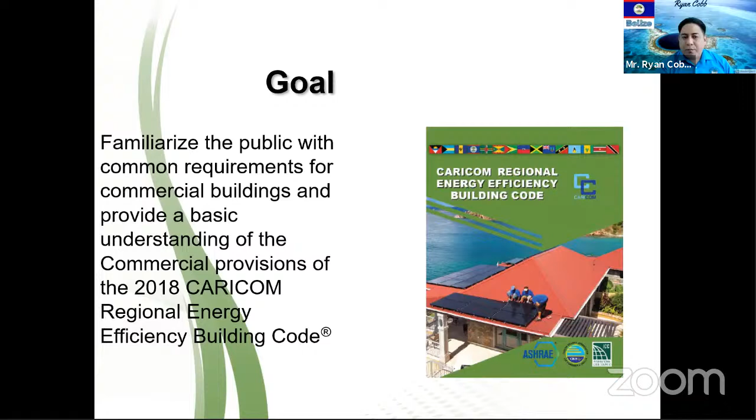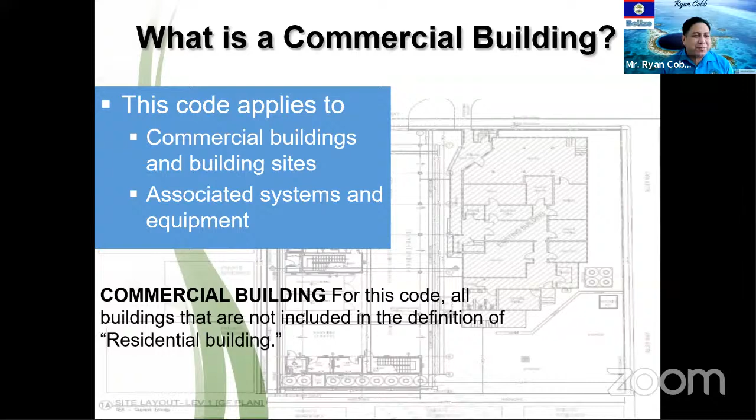But before we begin, first we must understand what commercial buildings are. The answer to that is quite easy today because of the presentation by Mr. Churchill yesterday. Quite simply put, a commercial building is any building that is not classified as a residential building. Going back to yesterday's presentation, it showed us that a residential building is any detached family dwelling or townhouse, or any building used for residential purposes that is 3 stories or less above grade plane. So any buildings that do not fall within that criteria are classified as commercial buildings.

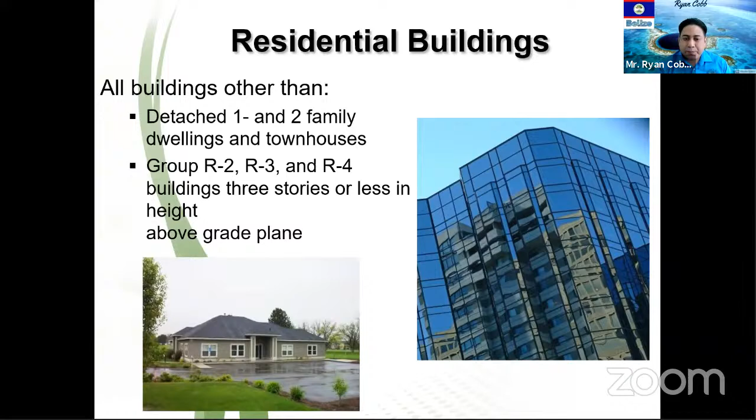But how about those buildings that have dual purpose, those buildings that serve both as residential and commercial, as many buildings within our region occasionally do? Usually you may have a family store and you live on subsequent floors above that. The way the codes are applied is that for each section of that building, you apply the respective codes. So for the residential section, you'd apply the residential codes, and for the commercial section, you would apply the commercial codes. Of course, all of this still has to meet the criteria of the previous slide, where if the building is above 3 stories, then all commercial building regulations and codes have to be applied.

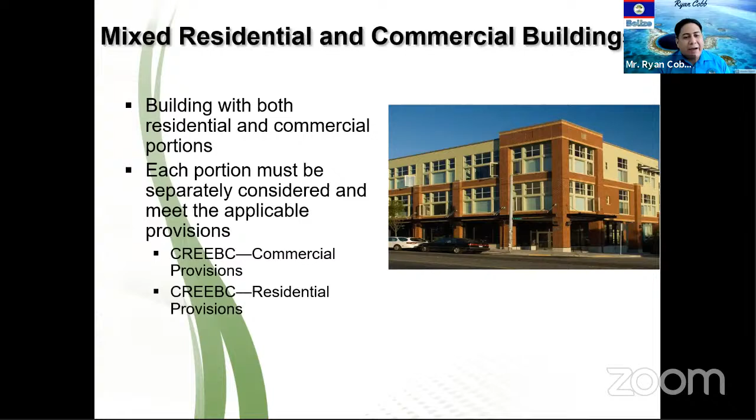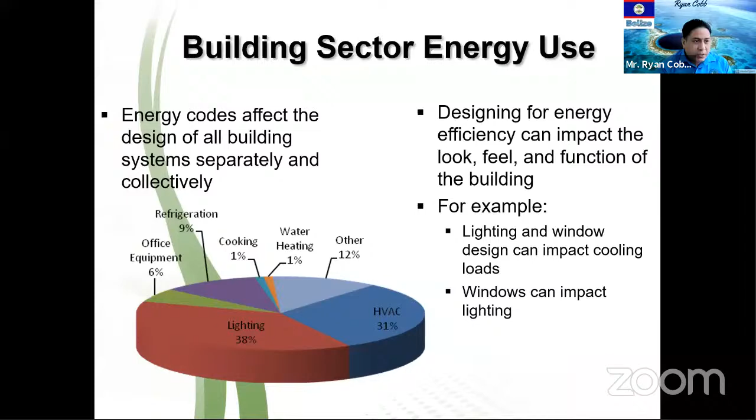What are the implications? What are the forms? And how do we do the compliance for the different sections? The intent of the code itself is to conserve energy over the useful life of each building, promote flexibility and innovation, and this code does not override any other pre-existing codes within the country or region of application.

While this may be the outlay of the intent within the code itself, ultimately what the code is trying to do is get best value for money. What do I mean by that? I mean you create the best living conditions, the best interaction conditions, the best business conditions for value of money. So ultimately what we're trying to do is save money for the type of work that the building is doing.

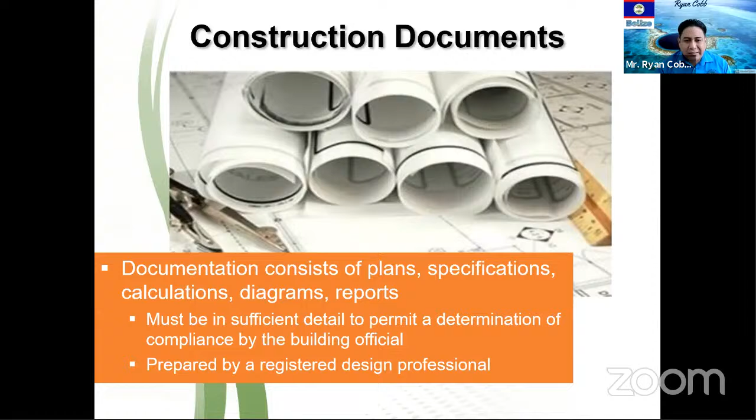Of course, for the implementation of these codes, we must all prepare the various construction documents required to submit to your local authorities. These documents must be very specific and have sufficient detail to determine the compliance of each building.

The information in these documents must include, but is not limited to, the thermal envelope of the building, the air filtration, the mechanical systems, water heating services or systems that they may have, and the electrical and lighting controls.

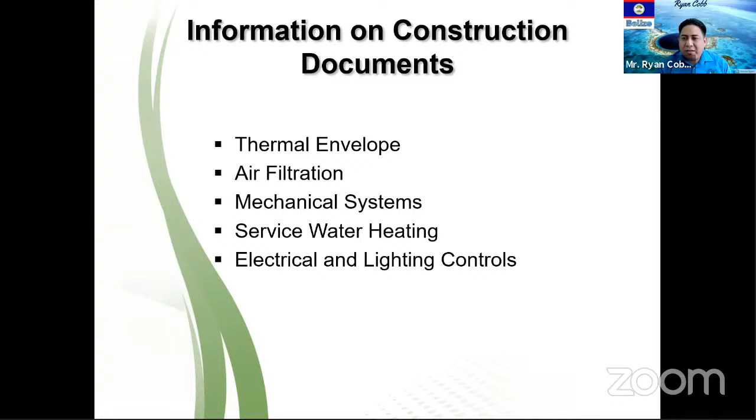As you may have seen from a previous slide, the electrical and mechanical systems make up the majority of the energy use of a building. So all other components are basically to help with that as well, to help reduce, not the percentage, but definitely the amount of energy that you use in these systems.

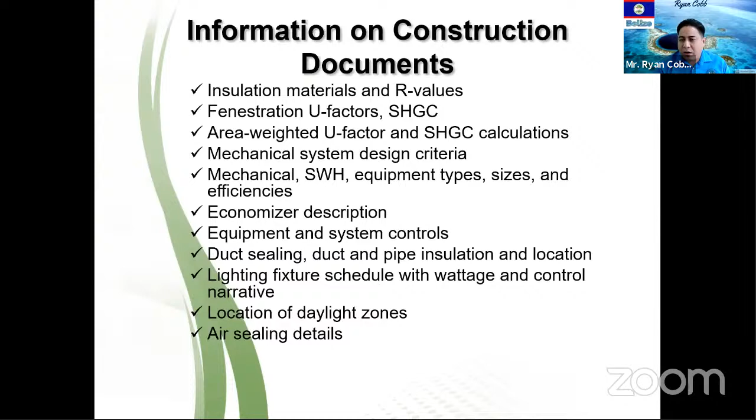This is just a little bit more detail of the different types of information likely found on these construction documents, which would include things such as insulation, U factors, your fenestration, your heating controls such as economizers, your ducting, and any type of daylight controls you may have for both interior and exterior lighting.

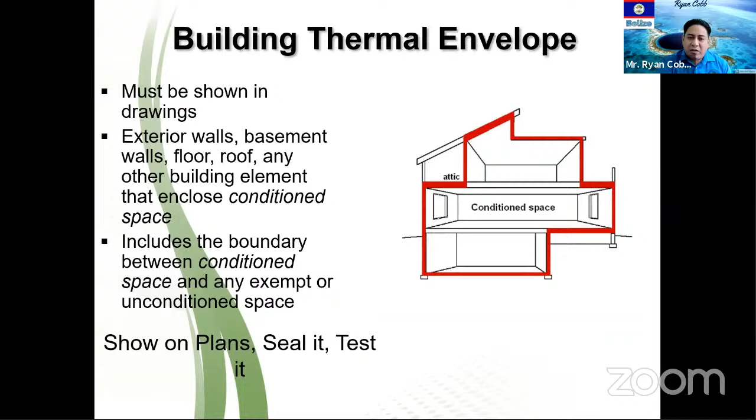But in order to design, first we must classify what are the different parameters that we need to design for. And this is all based on the different climatic zones that exist within our region.

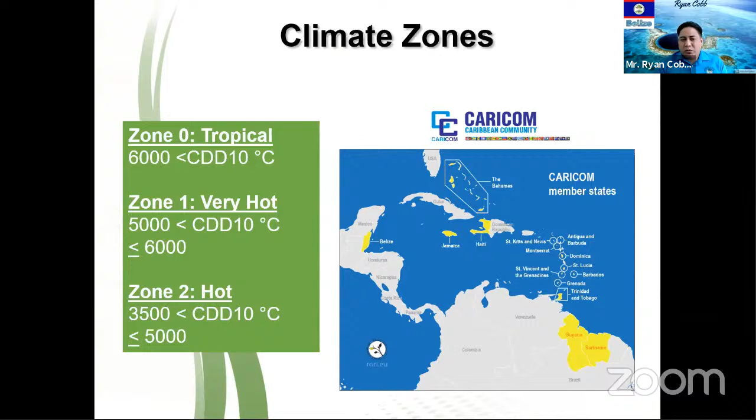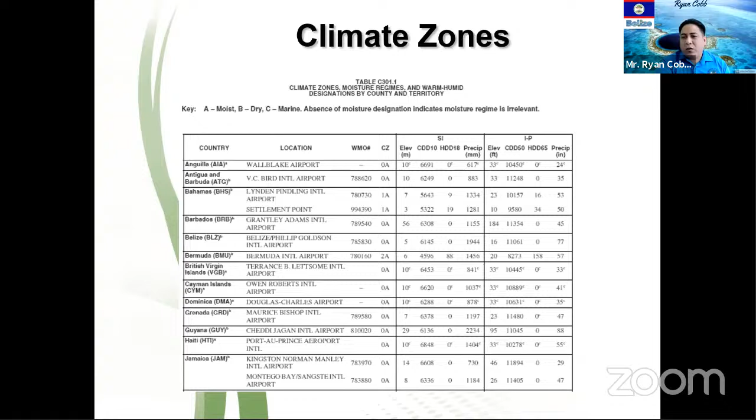For example, I am currently residing in Belize, and Belize is considered a tropical zone. So you can see here on the CZ, it is 0A. So Belize is considered tropical zone 0.

When designing for cooling, we have certain parameters that we must adhere to. For interior design conditions, the maximum cooling that we should design towards is 24 degrees centigrade, and for heating is 22 degrees centigrade. These are the parameters used to both test and certify that your buildings are in compliance with the standards. It does not mean the building cannot cool or heat beyond that, but those are your design parameters.

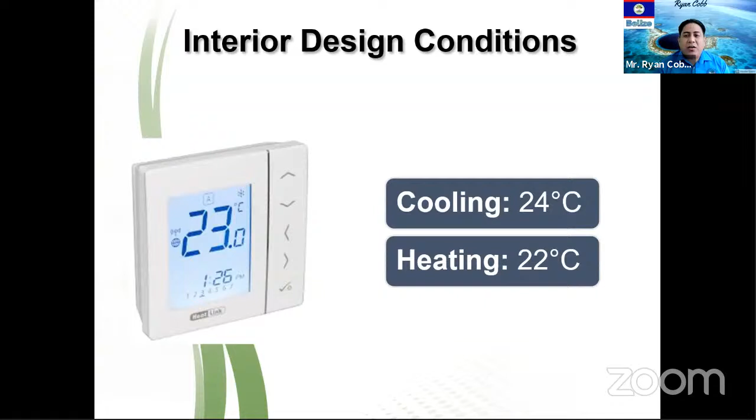You must also consider your building materials, which are important. Within your building materials must come the labeling so that your contractors know the different types of insulation and U factors they are using within the construction zones. Those apply to both traditional methods, such as blow-in insulation, or those you may use to cover the walls so as to increase your insulation on your walls.

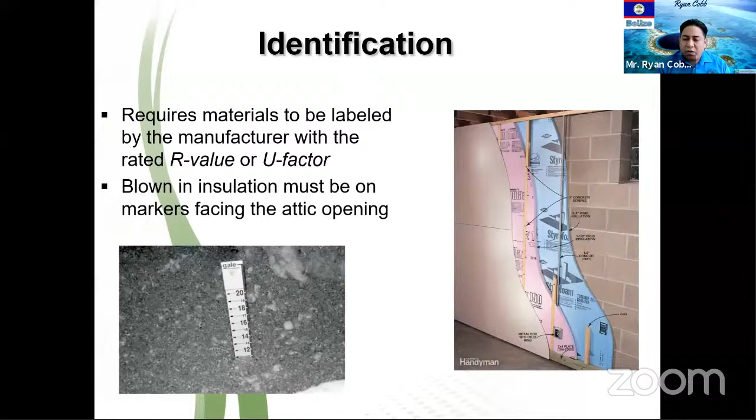Your windows and doors also now go through this requirement. Previously, as said in yesterday's conference, we had typically gone about picking windows and doors just by design, how aesthetically pleasing and functional they were. Well, now we must go a bit further than that and look into the thermal capacities of these different utilities. We must look if they have any type of glass, see if they're glazed, double walled, and even your doors, to see if they match these criteria as well.

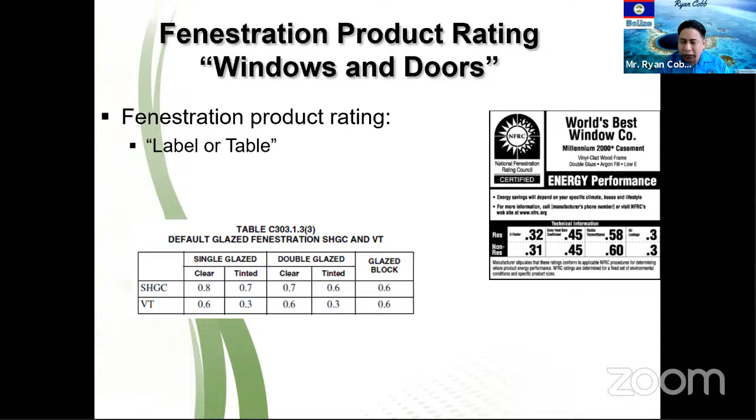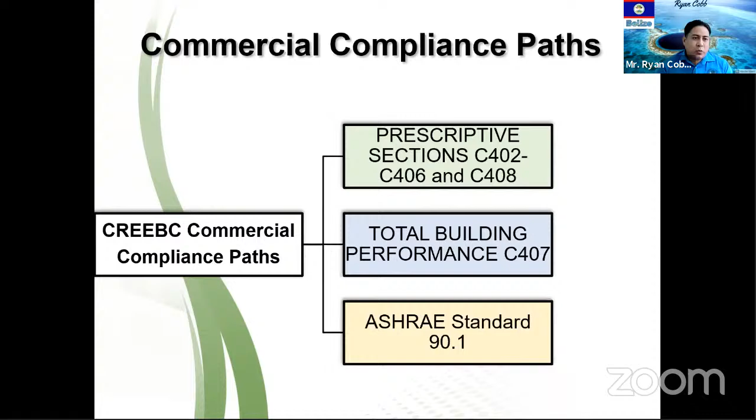Within this code, as is also the case with residential buildings, there are three ways of being in compliance. One is the prescriptive sections, which detail what needs to be implemented for the various areas included in the code. Another is total building performance, where you have mandatory and modeling scenarios that can be used to determine if the entire building is in compliance. You also have the ASHRAE standard, which will be covered in more detail in tomorrow's session.

To go into a bit more detail within the prescriptive sections, as we stated, it is broken down into various components: your envelope or thermal envelope, your mechanical systems, your water heating, your lighting, and additional efficiencies such as more efficient lighting, more efficient ACs, or renewable energies such as solar, wind, and heat pumps.

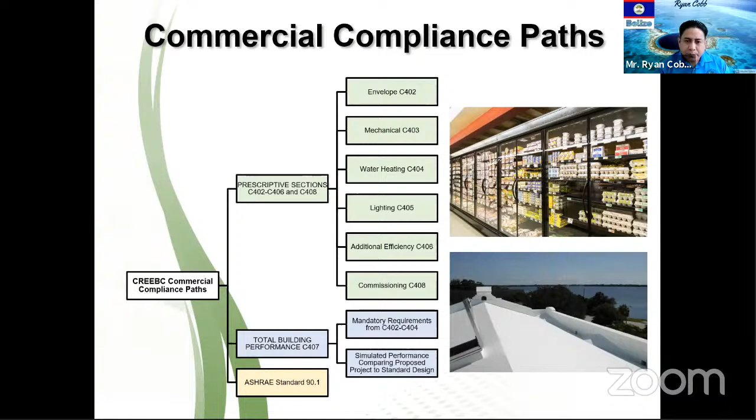So let's go into the building envelopes. When we talk about the thermal envelope, we are specifically talking about structures such as the roof, the walls, the vertical fenestrations, and skylights. Fenestrations are all those exterior wall openings that have doors, windows, and skylights. Those are what are classified as fenestration.

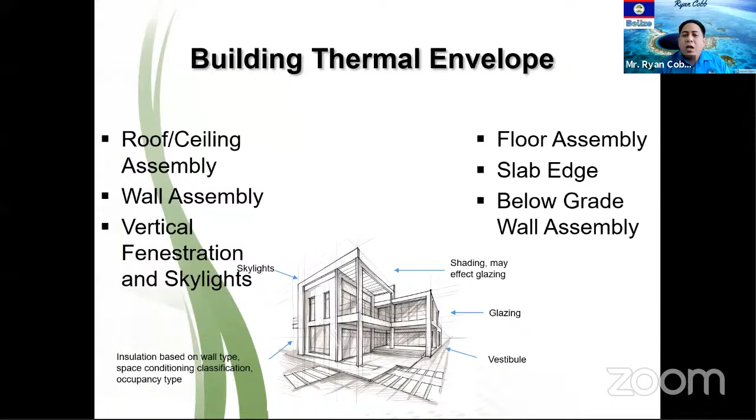We must also importantly look at your floor assembly. Is your floor assembly properly insulated? When we talk about insulation, we're not talking just about things such as blown insulation, but it also goes into the type of concrete used for those floor assemblies, such as ground floor and even intermediate floors.

The prescriptive path compliance will tell you what are the requirements for your insulations. They tell you the thermal requirements for your roofing, for your fenestrations, and also what are the permissible allowances for your air leakages.

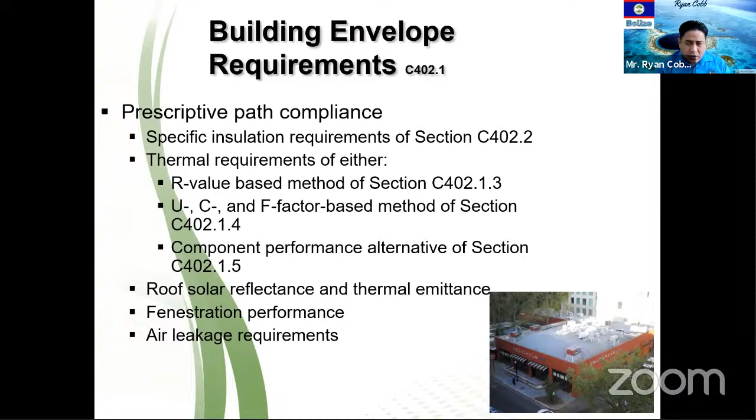Here we have an example of the type of insulations that certain establishments may want to use for the roofing. As you can see here, they are putting in slabs of insulation over the metal corrugated roofing.

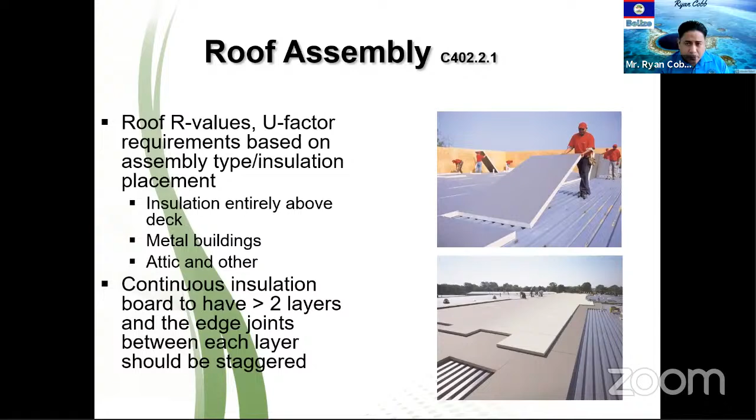We also have solar reflectance and thermal emittance requirements specifically for those types of metal roofing. For skylights, which are also considered fenestrations, there are acceptable limits and treatments needed for those types of structures.

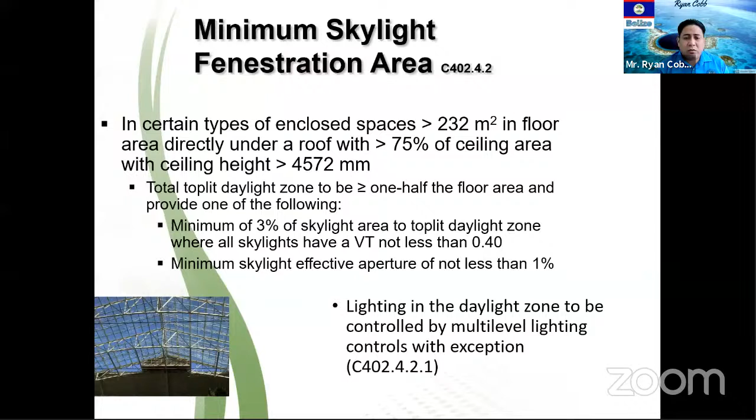When we go into air infiltrations, we're talking about your air leakages, your barriers, your air intakes, because one thing a building needs to do is air exchanges. You need to ensure proper levels of fresh air coming into the building, so as to have proper levels of oxygen and release harmful carbon dioxide and carbon monoxide gases back out into the atmosphere.

This also covers areas such as vestibules, which are the areas between your outer door and your inner door. These are usually where, whenever you step into a building, you feel that rush of air before actually getting inside. These are what are considered the vestibules of the building.

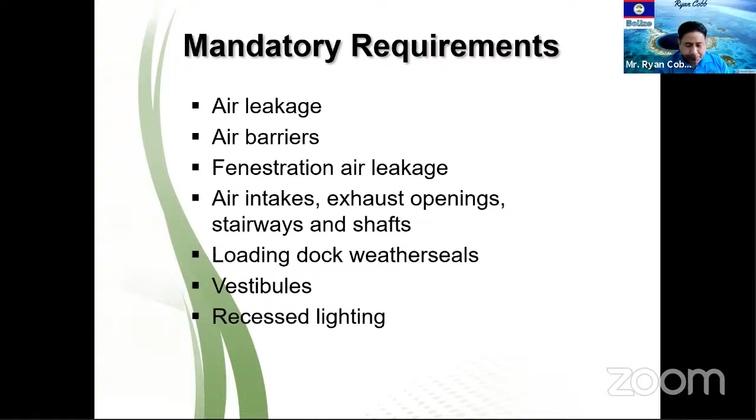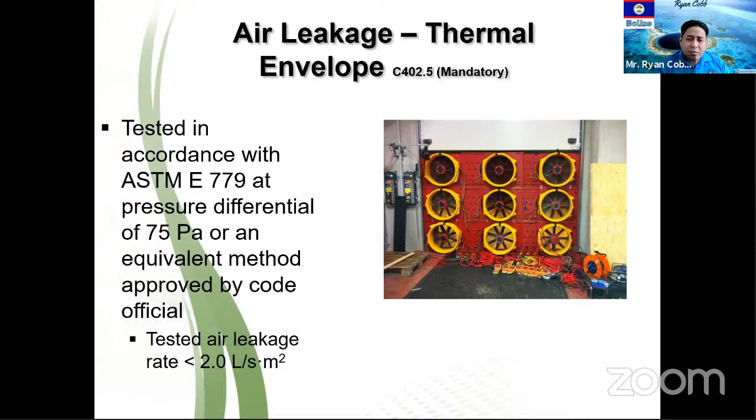Your air leakages are normally tested by positive pressure. Usually you pressurize an area, and over time you measure how that pressure trails off, if it trails off, and what are the permissible levels for those pressures to go down.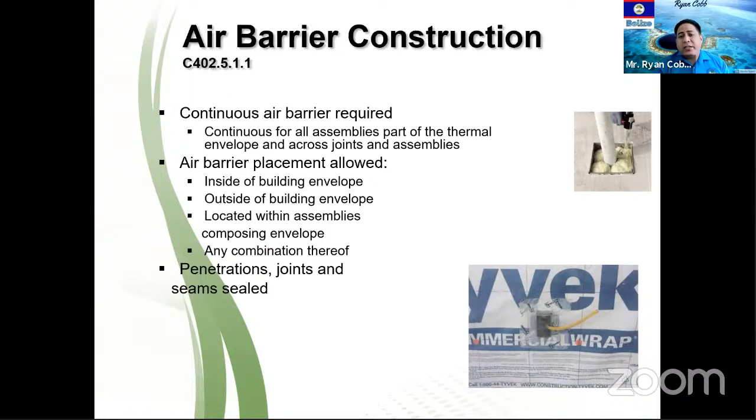Under your air barrier constructions, any plumbing or electrical that goes in between floors or between buildings needs to be properly sealed off, not just insulated, but properly sealed, so that there are no air leakages between these cracks and crevices as well.

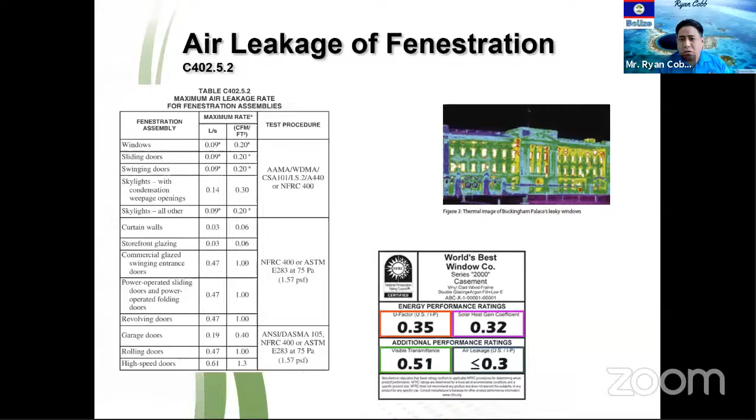The use of thermal cameras is a very useful tool when looking at very large buildings. You can determine if there are any types of air leakages just through your thermal devices. You'll be able to detect hot and cold spaces, and that's usually how you can tell if it's a heated area with heated air coming out, or a cool area with very cool spots, specifically around doors, windows, or service panels.

One area that's not often looked at, but is vitally important, is loading dock areas. If these areas are conditioned, they need to ensure they have weather seals, because they too form part of that thermal envelope and air leakage envelope.

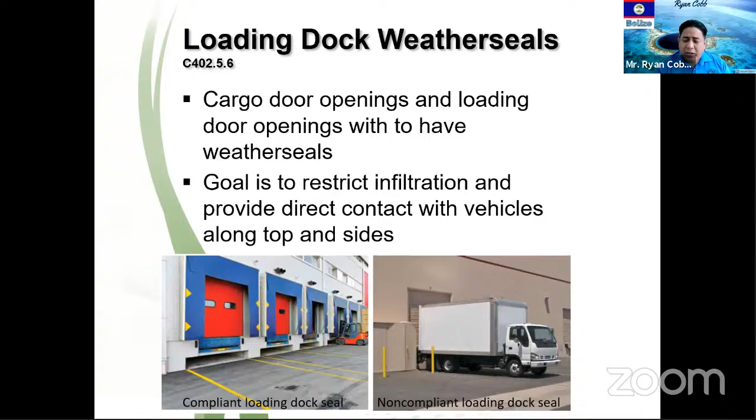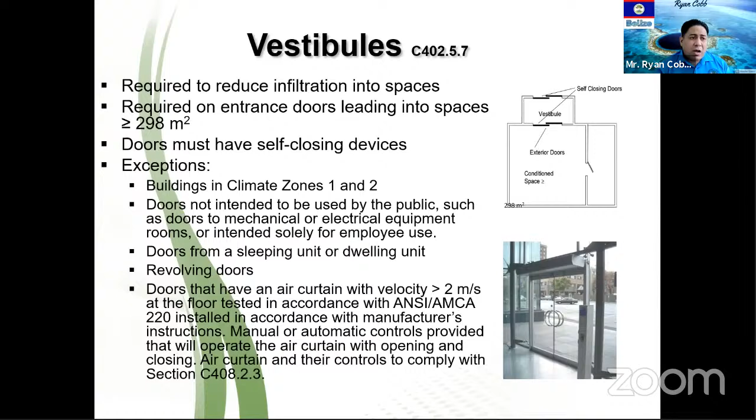Here again, we have a demonstrative view of what those vestibules are. It's those areas of entering, the first door of entering the building, and the other door of just going into now what is the trafficked area of the building.

Recessed lighting is very important, as is the case with the residential building. Recessed lighting has to be proven against air leakages, and they need to be energy efficient. So the lumens per watts are also described, not for the individual lights itself, but for the lighting of the area that it's currently housed in.

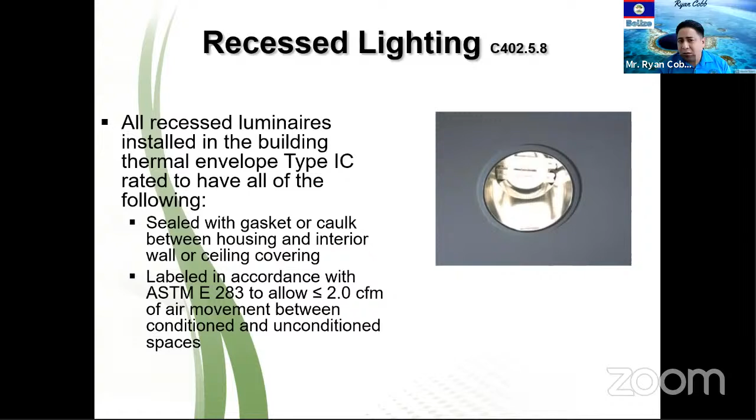All of these, the labels, the different allowances, all of these can be found within the handbook. That's one of the reasons why I'm just going quickly through this slide, so that everybody could have a good understanding of what the entire imposition is of these codes.

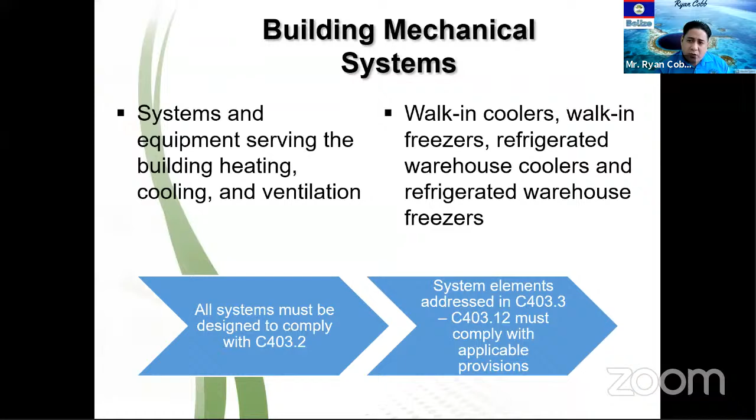Then we come to the mechanical and service hot water areas. These are systems that are used to either heat, cool, and ventilate the buildings. This also includes your walk-in refrigerators, your walk-in freezers, both for your commercial applications, such as retail houses where you have your display cases, and for storage areas where you have your deep freezers for things such as your meats and other products.

So there are mandatory provisions when it comes to these systems. You have to do your proper load calculations, your proper sizing, your ducting, your sealing off of the ducting, and also your ventilation—what are your required ventilations, your CFM, your cubic feet per minute.

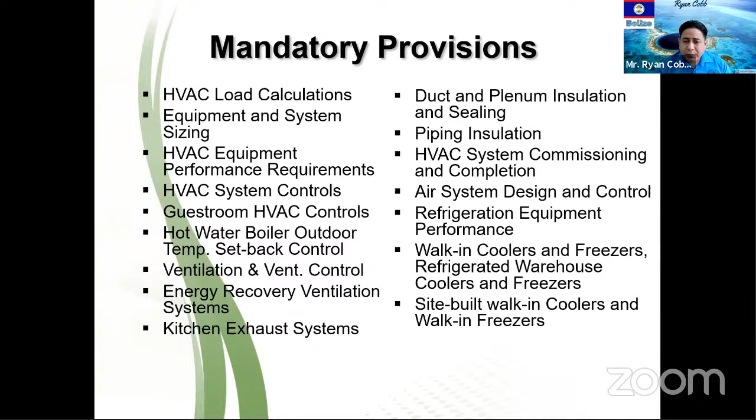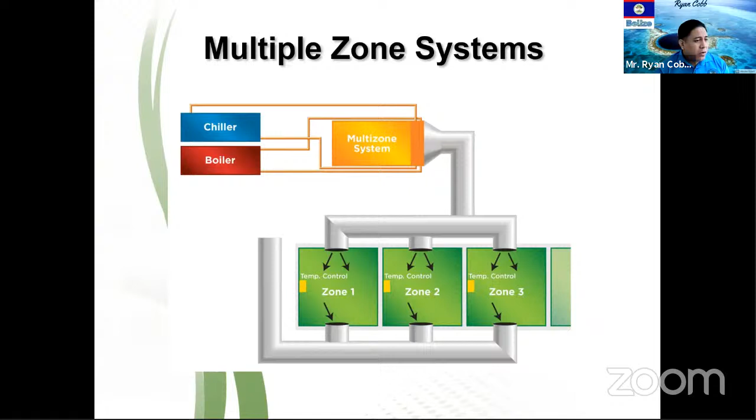And these apply to both single zone systems for those small commercial entities and those mixed entities where you have residential and commercial, where you may have separate systems, which then are classified as single zone systems. And you have your multiple zone systems, which either cool or heat different floors or areas within a commercial building. Again, all of these are detailed within the manual.

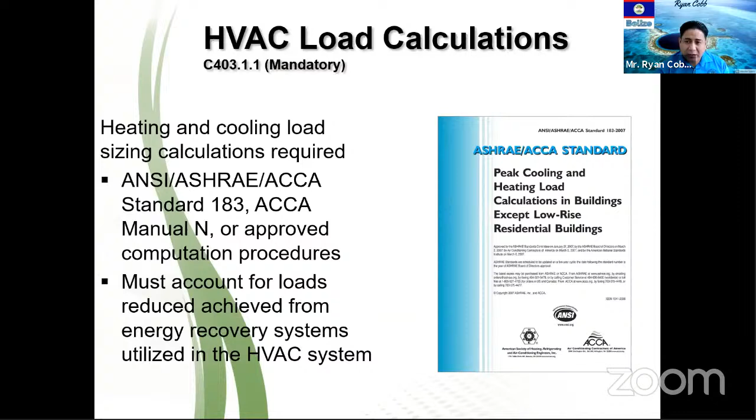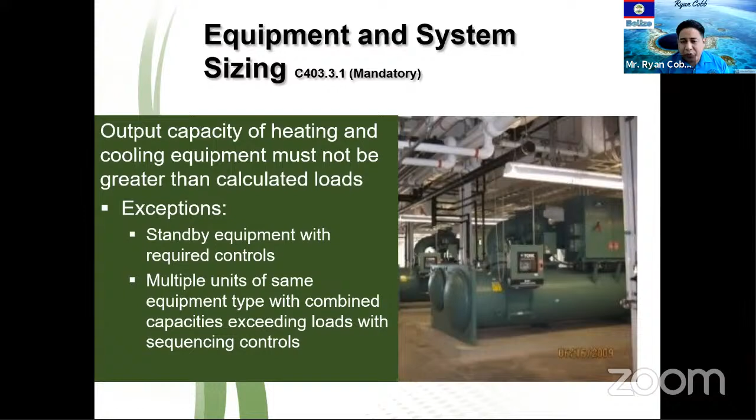You could say the Bible for the heating or cooling industry is the ASHRAE standard, so that is referenced there. And these are your economizers, your heating elements, which must also be calculated and prescribed within your planning documents.

We must also look at the different controls for these systems. We must look at the different thermostatic controls, your on-off controls, whether they be automatic or based on smart systems, which can detect either how cool the area is or the air quality of the area.

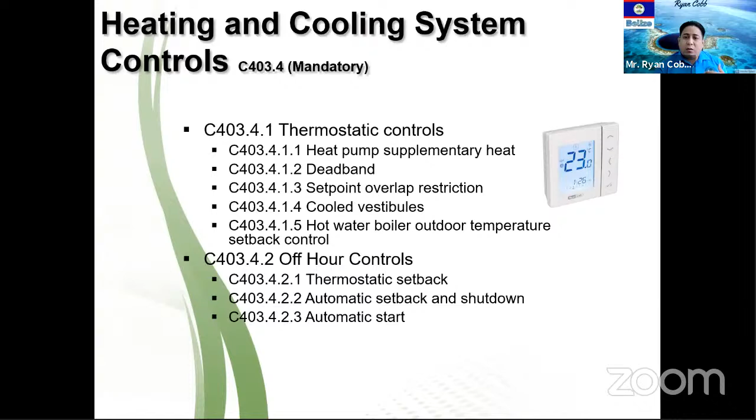What many of the new systems are starting to look at is, instead of exchanging air on a timely, scheduled basis, these new systems now come with sensors that detect oxygen levels, CO2 levels, and CO levels, and they determine if it's safe either to recirculate or if there's a need to exchange for fresh new air from outside.

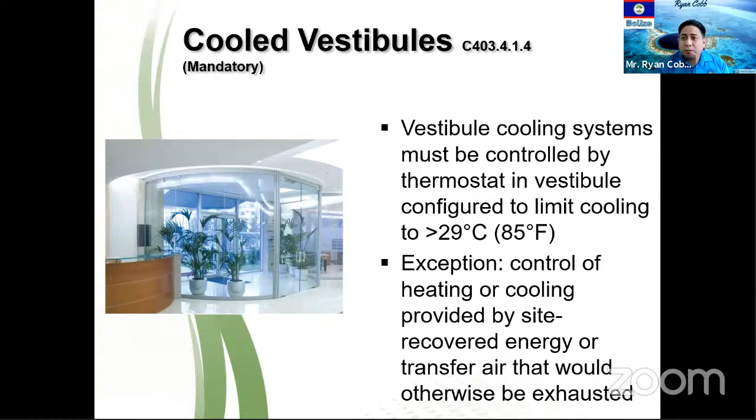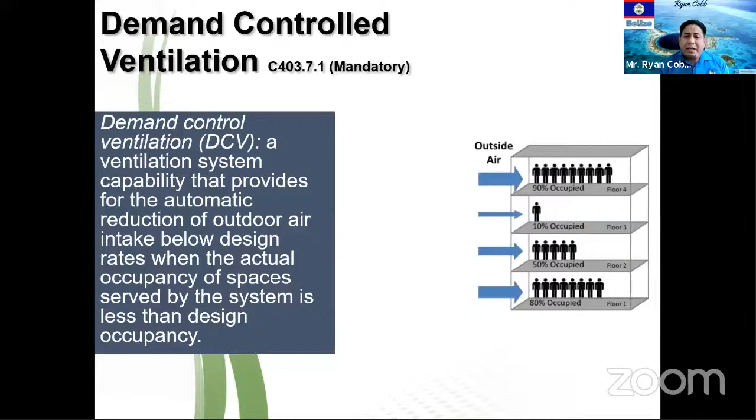These controls are also applied to the vestibules and also applied for your demand control ventilation, because the cooling and heating requirement is quite different when you have a 10% occupancy compared to an 80% occupancy. So all these demand controls are prescribed and demanded so as to alleviate these types of circumstances.

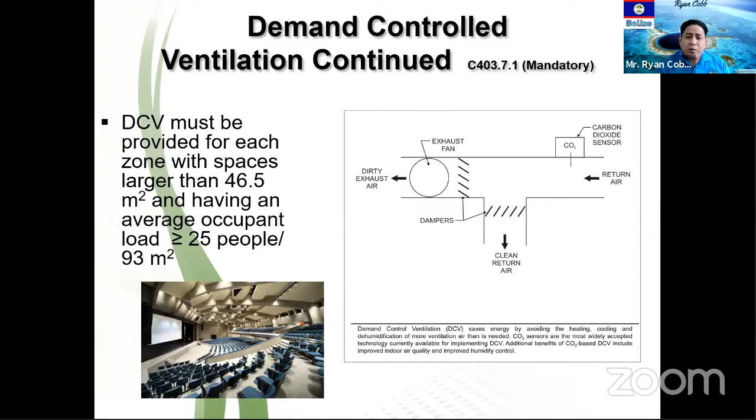Here again, we have an example of demand-controlled ventilation, specifically used in large arenas, conference halls, and one that we may have seen on our various travels, which is the automatic cutoff of AC systems in your hotel rooms.

These work with smart keys, where as you enter a room, you place your key card in there, and that activates basically the electrical system of your room. That allows you to turn on the lights, and allows you to turn on your HVAC and heating system.

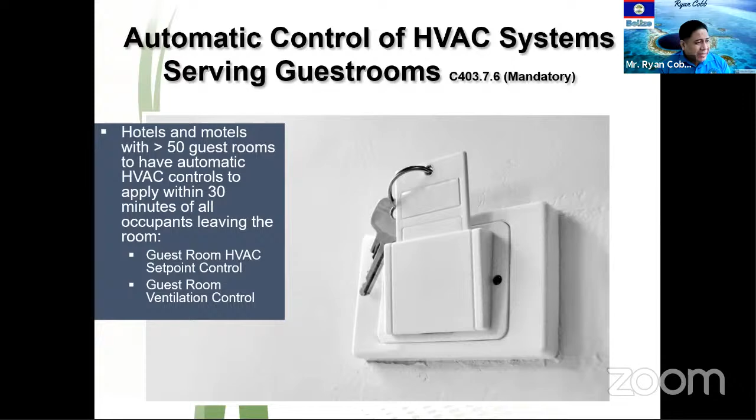Whenever you leave a room, you typically take out the key, and 15 minutes or a maximum of 30 minutes later, the room automatically shuts off. Of course, other rooms can program this to be within whatever parameters they want—it can be less than 30 minutes, but the code mandates that it must be within that 30-minute period, a maximum of 30 minutes.

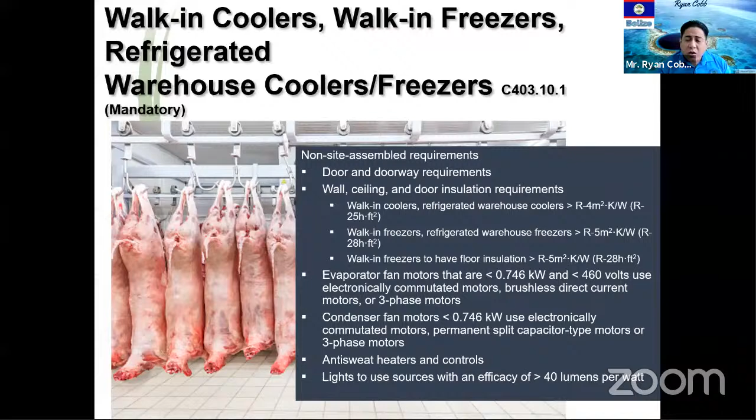Here again, we have it that there are certain prescriptive measures for your walk-in coolers or walk-in freezers, your warehouse freezers, and also your display cases for your retail commercial entities.

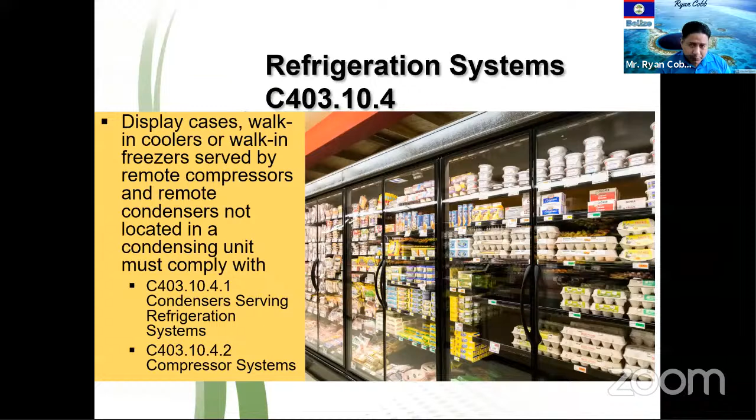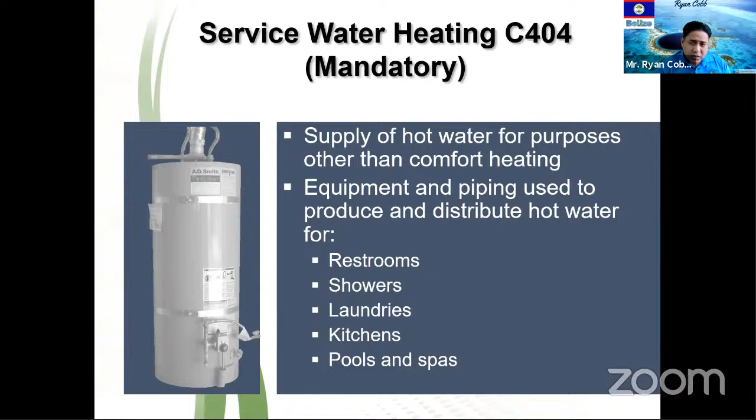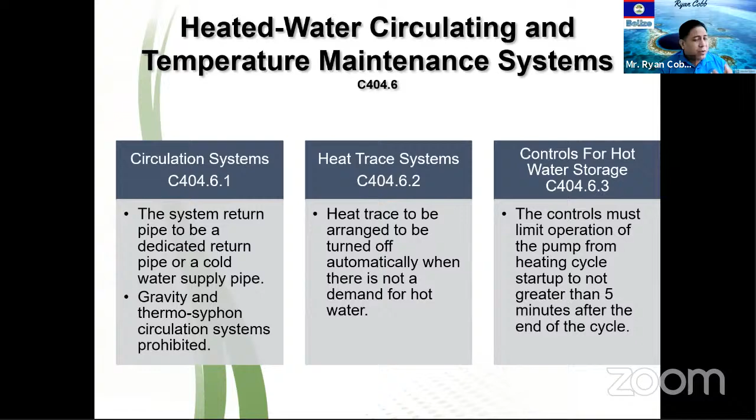Here we have for your service water heating, which would supply your restrooms, your showers, your kitchens, your pools, your spas. And again, we have the different codes that give you your prescriptive compliance codes towards these different systems, including those for pools and spas.

Lighting is one of the most crucial systems. Apart from HVAC, it's the most energy-intensive sector within any building. So this includes both interior and exterior lighting, the different controls that you may have, and the maximum density—the lumens per watts per square foot that you'd have within a building.

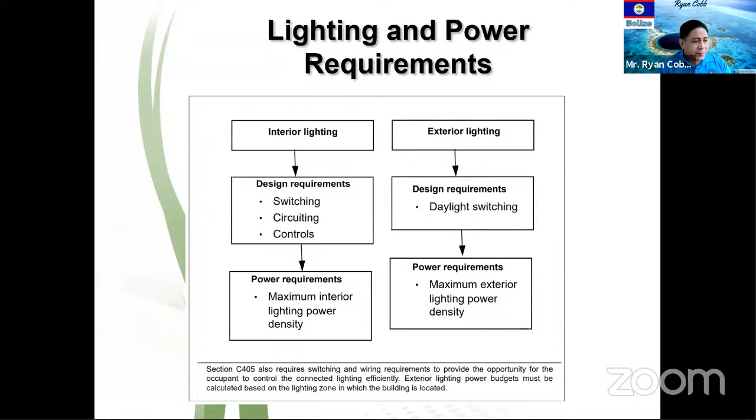But when it comes to lighting, you may say, well, I am looking to retrofit an old building—do I need to apply these new standards? The short answer is yes. Whenever you are retrofitting or changing the purpose of a building, these commercial codes within the CREEBC are applied. You'll be able to find all the details as to what level you need to apply these codes within the handbook. So the handbook itself is a very wise investment, not just for contractors, but for operators of commercial buildings as well.

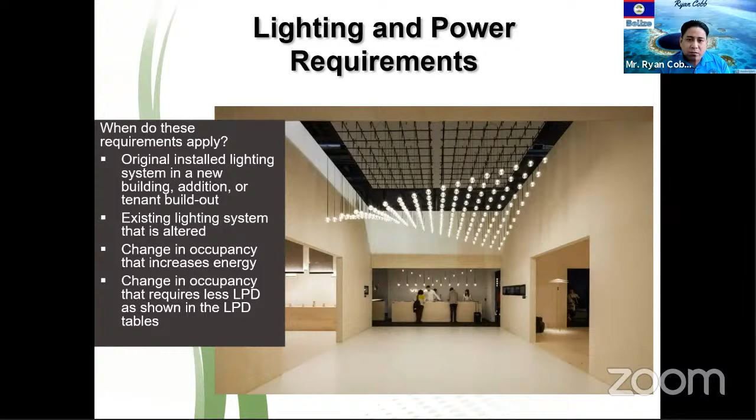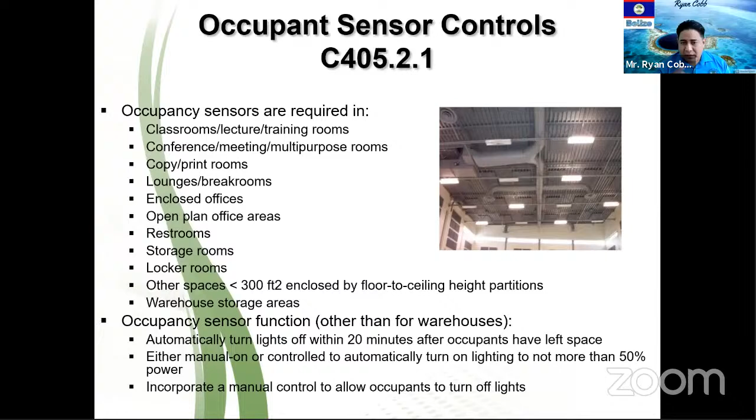Within lighting, we make use of occupancy sensors. Those are the sensors that once you leave a room, automatically turn on or off. They're very helpful within a warehouse, where they detect what specific area you are in and light that immediate area. As you walk into various areas, the lighting conditions change based on occupancy.

You have your timing controls as well, and you have your lighting reduction control. So this is either your dimming, or you're turning on and off certain areas within a specific area, lighting appliances within that area.

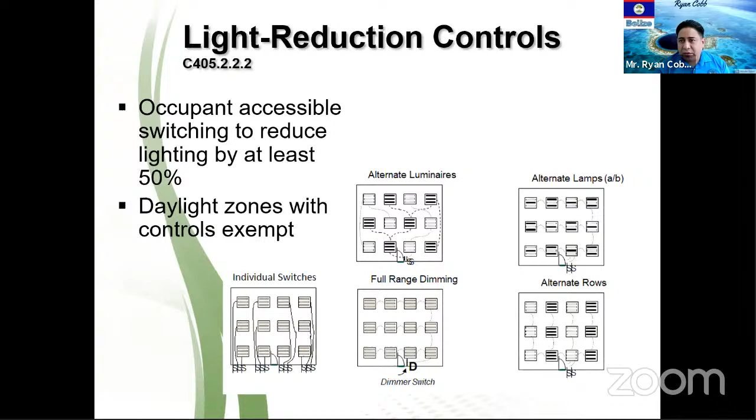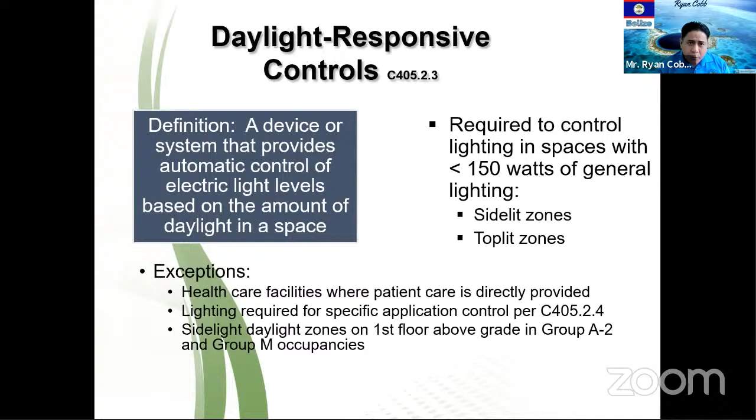You also have lighting that is based on daylight. Those would be the areas that have vestibules, but also have large amounts of windows and transparent doors. Based on the sunlight that comes into the building, these lighting conditions automatically change in response to the amount of light coming from outside.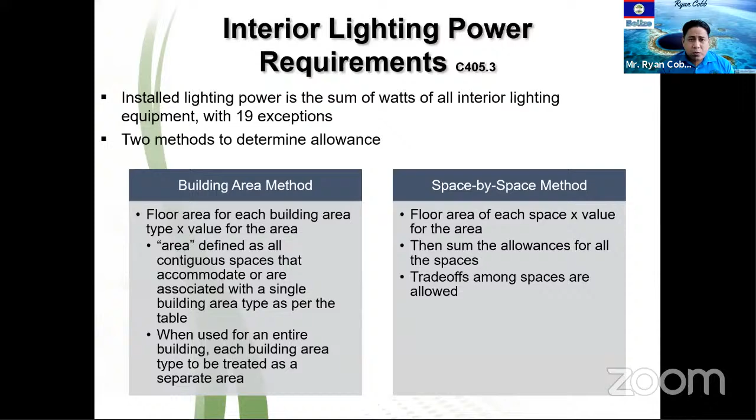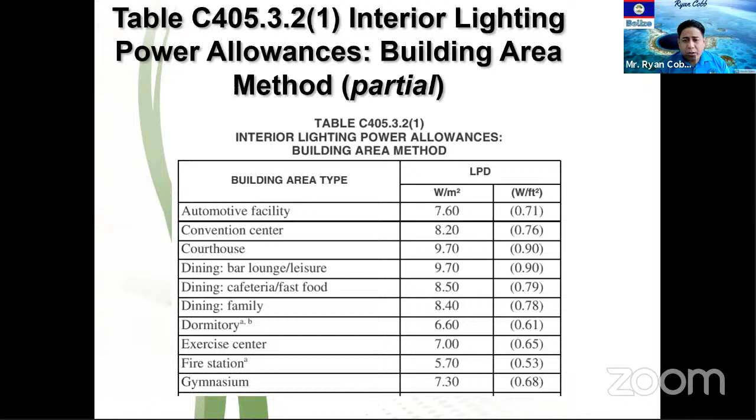We must also have control over our exterior lighting. Here, once again, we show what the different requirements are for both your interior and exterior, and how this would typically be viewed within your documentation and plans.

Within your exterior lighting, you have your power requirements. You have certain exceptions listed within code—you are allowed certain things such as lighting for safety, exit signs, arenas, and signage. So those are all provided for within this document.

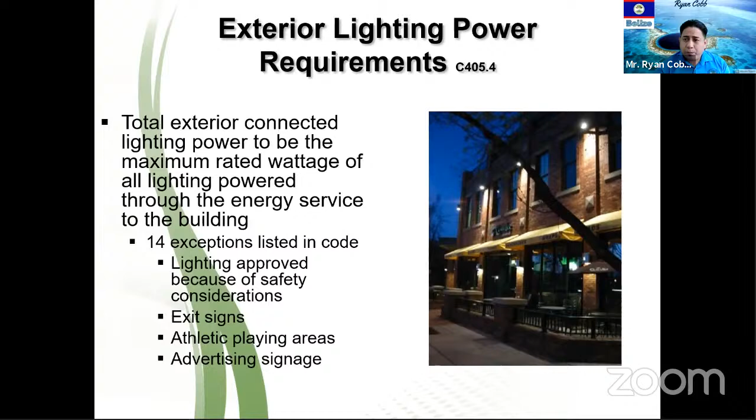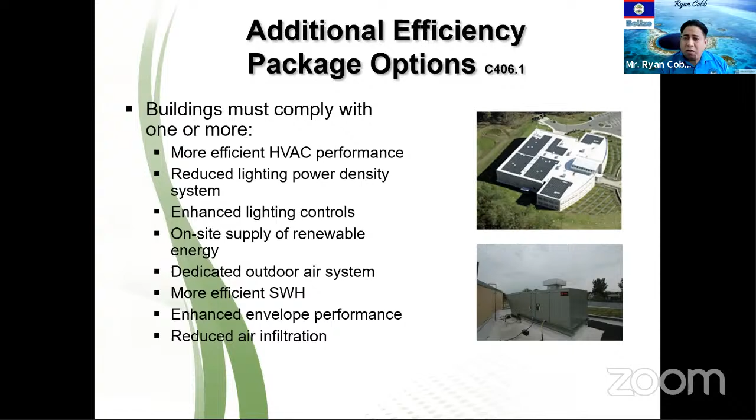Then we look at the additional energy efficiency packages. As I stated at the beginning, this looks at your AC or HVAC systems that are much more efficient, because within the code you are prescribed a certain efficiency. But nowadays there are a lot of systems that go beyond that limit and are much more energy efficient. So the code makes provisions for the implementation of these systems, for your lighting controls, for your heating, for your air infiltration—again, your oxygen sensors, your CO2 sensors, and so forth.

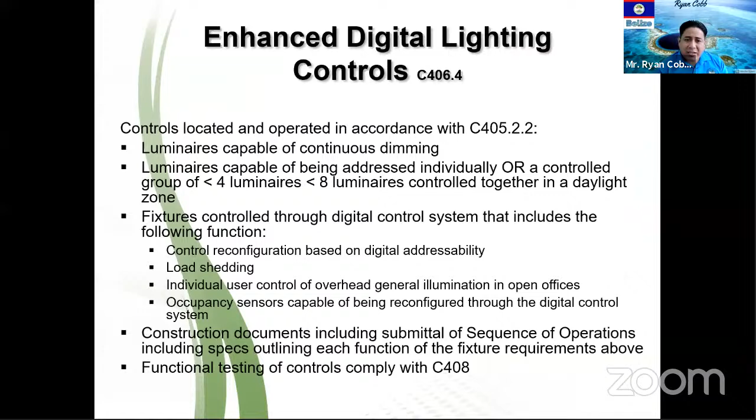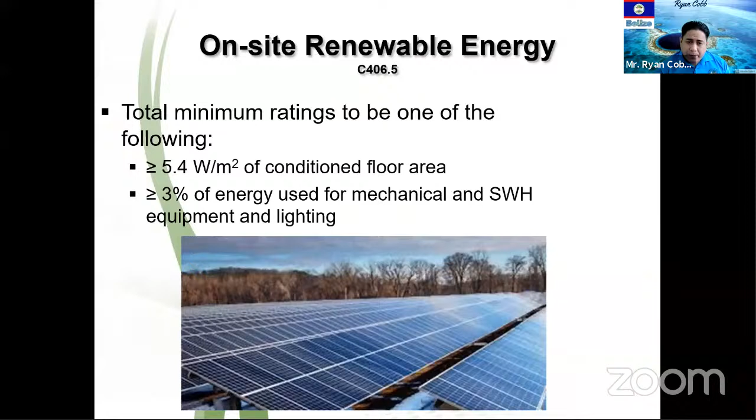You're also looking at enhanced digital lighting controls, and of course, on-site renewable energy—whether that be solar as pictured here, or you could use things such as wind or heat pumps.

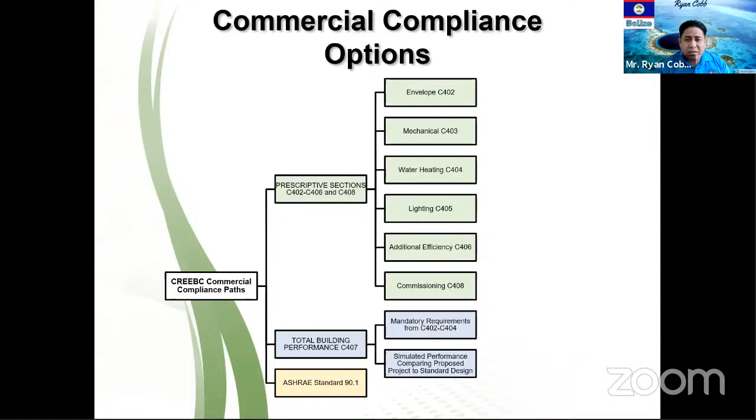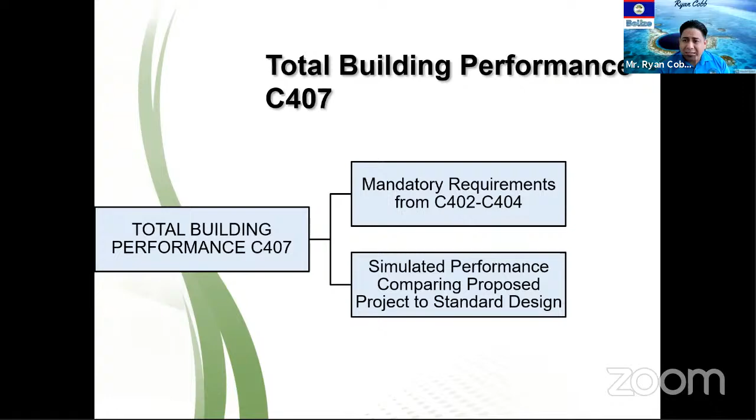And now we go into your total building compliance. As stated before, within total building compliance there are both mandatory and simulated performance, which are basically computer simulated designs that allow you to rate if your building is in compliance or not.

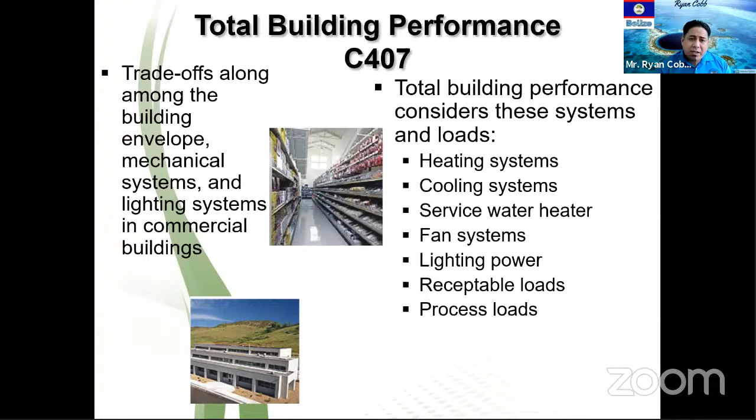So there are trade-offs when it comes to total building compliance. You can make trade-offs between your various systems—your envelope, your HVAC, your ventilation, your lighting—because you're not testing each individual system, but treating everything as one system. That's why it's called total building performance.

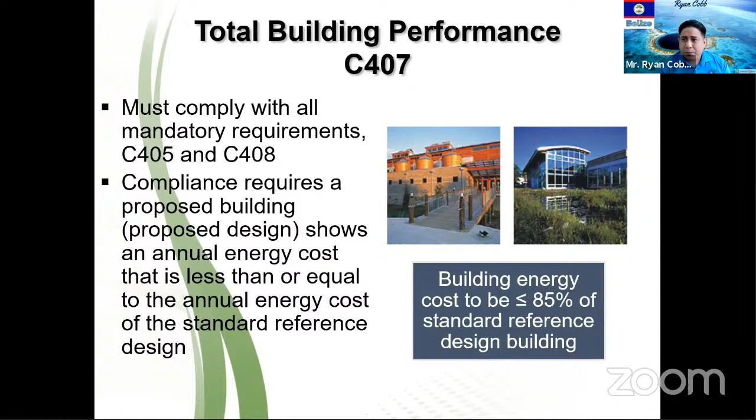But although there are leeways between those systems, there are certain mandatory requirements as well. Those include your annual energy use, the list of building features, the output showing total use, how the space is being used, and whatever errors you may have received during the simulation of those buildings. Based on that, you have to write in and explain why these errors were received and what remediations were done to alleviate those error messages.

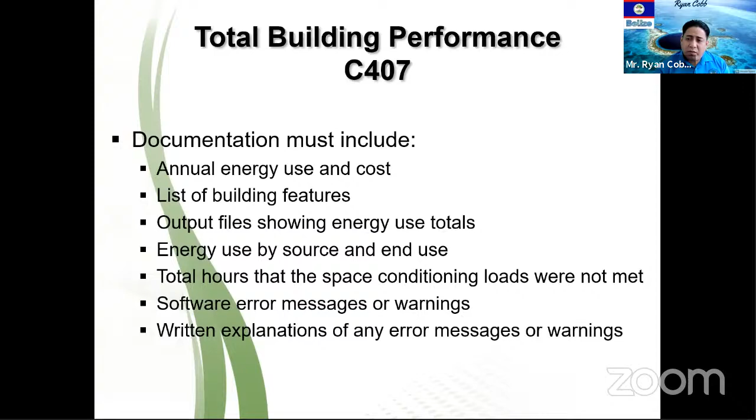So in short, those are the implications of the implementation of this regional energy efficiency building code within the commercial sector. I'll turn it back over to Mr. Platt to see if we have any questions from the audience.

The CARICOM Regional Energy Efficiency Building Code was developed to help property developers increase the energy efficiency and upgradability of their building projects. Energy savings help offset the potential higher cost of building your home to code, and enhanced upgradability helps commercial owners increase their competitive advantage, saving money over time. Additionally, lower energy demands during and after the building process can lead to community and national level benefits, like reduced reliance on fossil fuel generated electricity across the construction industry and in homes, lower national fuel import bills which can free up funding for other critical areas of investment, and fewer greenhouse gas emissions. So do the maths, play the long game, and help build towards a better future today. For more information on the CARICOM Regional Energy Efficiency Building Code, visit energy.crosq.org.